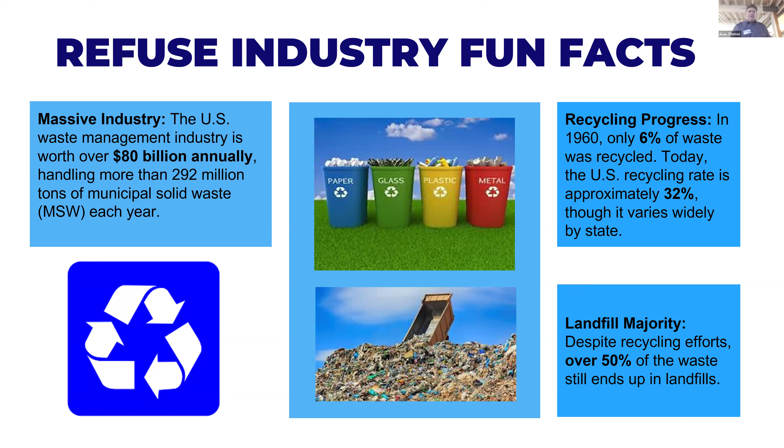And so a couple other fun facts. Electronics can be recycled, but it needs separate things, and usually there's a separate place to go drop your electronics off. So usually only 20% of electronics is really properly recycled.

And a big contributor, surprisingly, is food waste. Food waste is a huge contributor to landfills. And actually some municipalities, like the city I live in, the north side of town, just a few weeks ago, they started adding composting, a fourth type of trash. So I got trash can, recycling, yard waste, and now there's composting as a fourth type. So that is a huge contributor. Kind of surprising, but people throw a lot of food away in America.

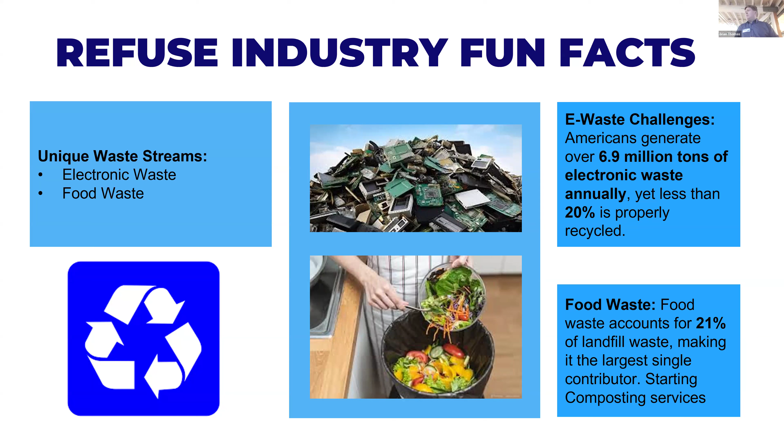Just a couple other fun facts. Some companies are learning to reclaim the methane from decomposing waste to generate electricity and can power like 1 million homes with electricity annually. And then single stream recycling, having them sort things or just allowing people to throw everything together and the company sorts it out. There's been different studies on how compliant people are with that.

So I went to go work for a company that's about an hour south of the Twin Cities that makes garbage trucks and cement mixers and other industrial trucks, not trucks that transport stuff, but trucks that do stuff, like a garbage truck. And they wanted me to connect them all to the cloud. And so they have 3 different product lines, and this is going to be important later on in the presentation.

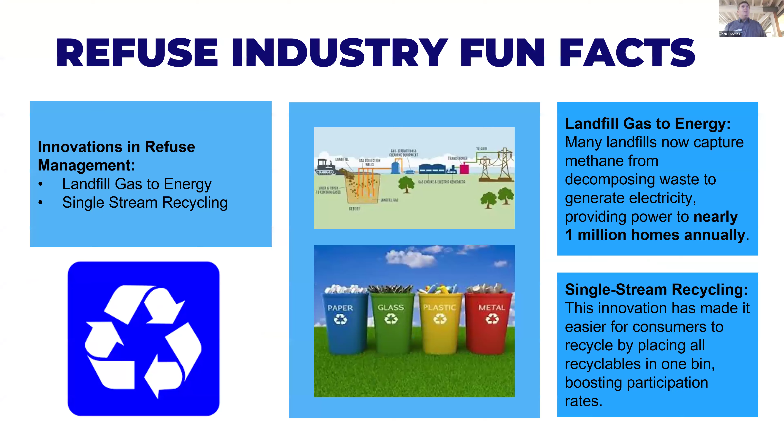There's a front loader that has 2 arms that will reach down and grab a commercial dumpster, like from a restaurant, and throw it over the front of the truck into the back of the truck. There's a side loader that has 1 arm that reaches off your curb, grabs a residential can and dumps it in the side of the truck. And there's a rear loader that has no electromechanical arm, but usually there's a second operator back there. And so we connected them all to the cloud.

So we designed a telematics unit and put that in the truck, and that connects to the CAN bus of the truck. CAN is an acronym. It stands for Controller Area Network. And so all the control systems of the truck, all the electronics of the truck, all communicate with each other with this CAN bus, this Controller Area Network. And so we connected this telematics unit to the CAN bus so we could monitor everything the truck was doing.

And then there's a cell modem in the telematics unit, which sends the information up to the cloud. So we monitor what's going on with the truck and make a cell phone call up to the cloud and transmit this data periodically. And from that, we were able to create websites that would allow big companies like Waste Management and Republic and small companies, municipalities, to manage a whole fleet of trucks, find out what's going on with them, and monitor them in real time to deliver performance, efficiency, and safety. So this is information going from the truck to the cloud to a website.

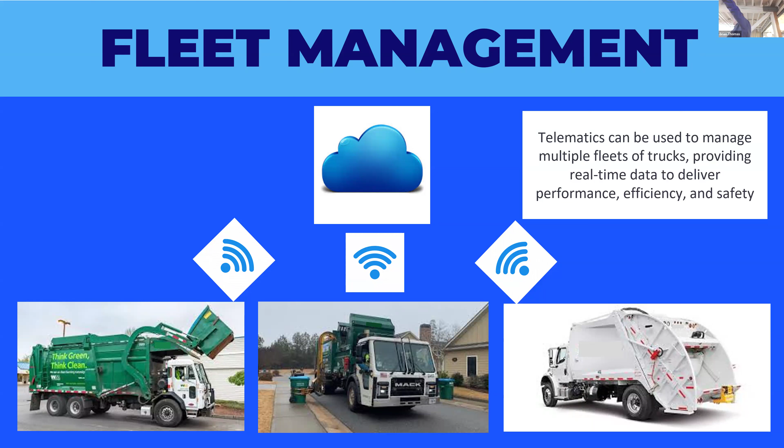And then we launched it with production-grade cybersecurity. A lot of times when you have the cloud, you've got different environments: a dev, test, stage, and production environment. So we had a security certificate in the cloud for our production environment. And then to make it secure in the truck, we created a public-private key pair. We kept the private key in our factory.

We signed the software when we created a new version of firmware for the truck. We signed it to make sure that it came from us. And then we'd send it over the air, and the truck would verify it with the public key and say, yes, this is software that's legit, that it came from the company and not some hacker. And then it would change the software in the truck.

And so once we had this, this is a platform that enabled the use of AI. So we could quickly load new software in the cloud, load new software in the truck, and regularly we could update software multiple times a day if we wanted to try new things with AI on the truck.

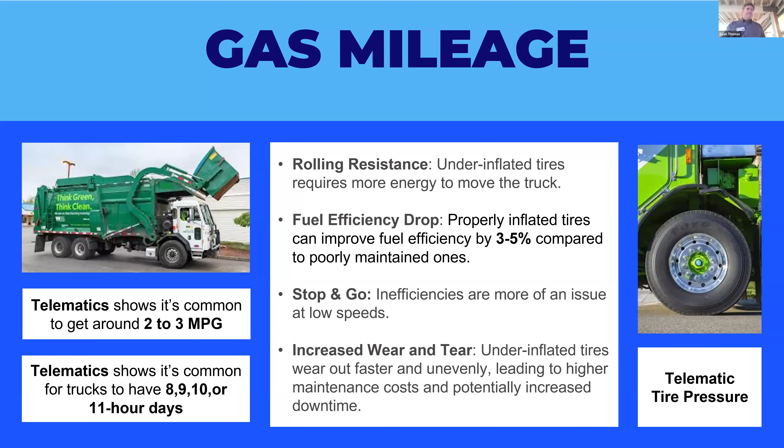So with the telematics, you can also do route optimization. You can help them find the most optimal route. A driver might be sick one day and they might have to reroute trucks. And so with this, you can dynamically reroute the trucks.

Another thing is backing up the trucks. There's not a lot of windows in these trucks and there's blind spots. And trucks can damage things when they're backing up. So we try to minimize the amount of times they back up. And we record every time they back up and we drop a pin on the map and we provide a report to management, and the management can look and see, why is this driver backing up 10 times more than this guy? Does he need coaching on how to drive a truck like this?

Or maybe it's legit because he's got a route that has a lot of cul-de-sacs on it. And in the cul-de-sacs, if cars are parked out there and the garbage cans are out there, trying to get a truck in there and around, that might be a legit reason why they're backing up, but they try to minimize backing. Okay.

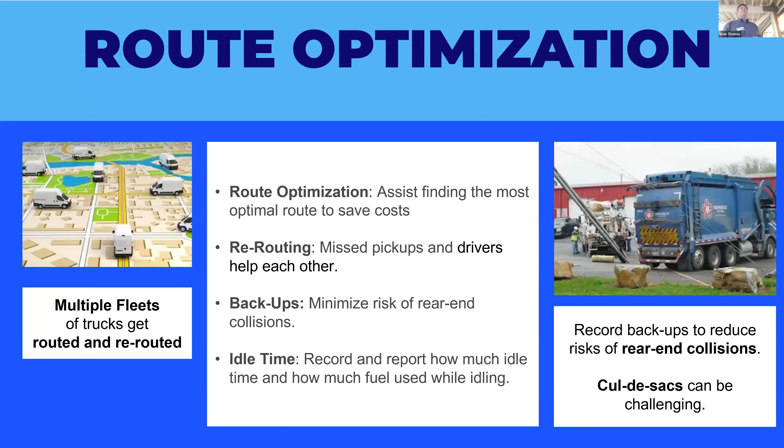So I was originally hired as director of advanced connectivity, which is just IoT, but we got the system up and running in just a few months and they were like, wow, we've been trying to get this working for years. And so they asked me if I could assume additional responsibility and be the director of advanced technology, which is AI and IoT, and be responsible for these advanced technology areas: automation, electrification, active safety, sustainability, which is friendly to the environment, and advanced connectivity, which is what I was originally doing. So I assumed this additional responsibility.

And one of the things we did is then we put cameras around the truck, so we could monitor what the truck was seeing when it was driving. And we took pictures all day long. And then we sent these pictures over to our friends in India, who helped us label these pictures and put bounding boxes on things to identify where the garbage cans were and other things that might be on the curb, like a mailbox or a dog or something like that.

And then we created an AI model and we trained it with all these pictures and we fine-tuned the model so that it could accurately identify what the garbage can looks like. Originally we took over 10,000 pictures of trash cans and we used 80% of those to train the model and then 20% of them to test our training to see how accurate it was. As time went on, we had more and more trucks with more and more cameras doing more and more routes, and we had more data. And after a while, we were using about 50% of the data to train it and 50% to test it.

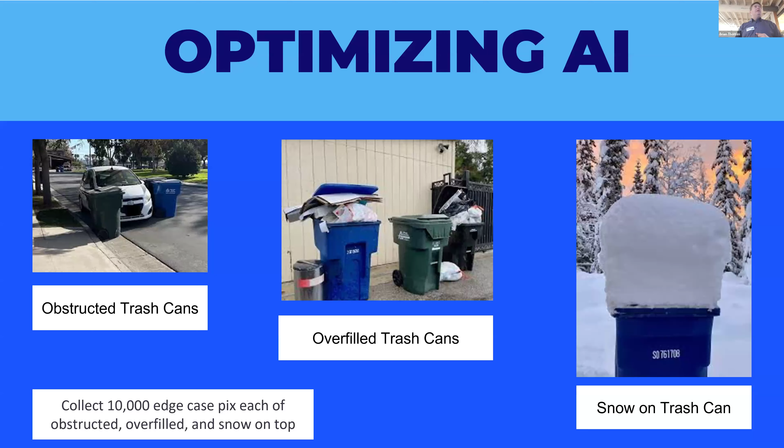Okay, and then, so now we've trained the trash truck to be able to understand what a garbage can looks like. Now here's a problem with the side loader. When somebody's been doing it for a few months, they get pretty proficient at it, but for the first couple months, they're not very good at it. They got a joystick that they can control that arm with. And sometimes they are not very good at it and they try to extend the arm and they tip the can over.

Oh crap, then you got a big mess of trash. You got to get out of the truck, clean up the trash. It's not fun. It's a big productivity kill. You got that little shovel on the side to help scoop things up, but it's not fun when you tip it over.

Or another thing that might happen is maybe they drive up to it and they extend the arm and, oh, I'm not aligned, pull it back, drive the truck up a little more, extend the arm, I'm almost there, pull it back. Okay, third time's a charm, I got it this time, let's dump it in, but it's not as productive to do it that way. But with AI, you can detect where it is and whether you're perfectly lined up with it and stop perfectly the first time.

Okay, and then we use LiDAR, which is like radar, but with laser beams. And that allows us to detect how far away the trash can is, so that we could extend the arm perfectly. We can stop perfectly with it aligned. We can extend it perfectly, grab the trash can, dump it in, set it down precisely where we found it.

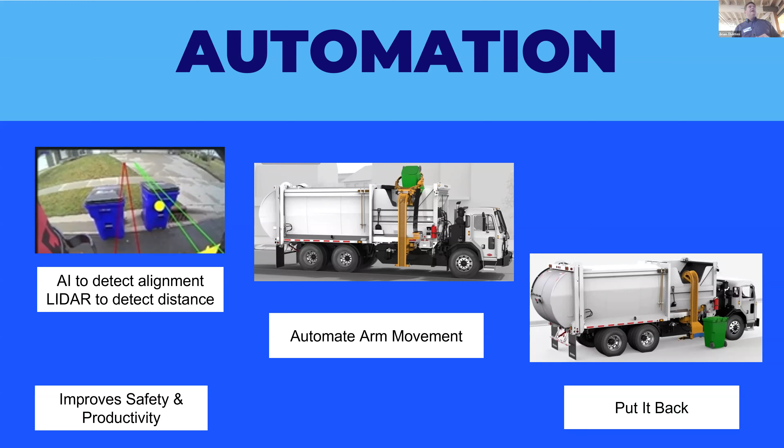Okay. Now, see here where this can is backed up against the curb. If you pushed it, if you weren't lined up, you could see how you could easily tip that over. One thing is trying to put it back where you found it. I'm going to show you a video in a little bit that shows this. The first part of the video is the old system, and the second part of the video is the new system.

Okay. So here we put it on a Waste Management truck, and see how the customer had their trash can sitting on the curb, but he left it in the street, he didn't put it back where he found it. Here he's pulling up, but he's not lined up right away. So he extends the arm, but he's got to actually drive the truck forward before it's lined up, before he can grab it. And then he puts it back, but he doesn't set it on the street or the curb. He sets it hanging off the curb where it's dangling and wobbling a little bit, so it's not the best thing. And here he's trying to line up, but he's not perfectly lined up.

Now here's the new system with it updated. He pulls up perfectly, grabs it on the first try. And it was sitting on the driveway and he doesn't leave it dangling off the curb. He puts it back where he found it, right on the curb. So it may seem subtle, but these things add up. If you do it over and over all day long and save a few seconds for every can, that can add up to a productivity improvement.

Now, this is one where the trash can was overloaded, but it was able to detect the can even with it overloaded and then put it back on the curb instead of the street or dangling off there.

So that's one use of AI. And another one, this is a combination of AI and IoT. So with recycling, this is the mixed recycling that I was talking about, where you can mix multiple different types of plastics and cans together in there. And with AI, you can in real time go in and look at the trash and see what we call contaminants. If there's something they put in the recycling that's not supposed to be there, it's contaminated, we call it a contaminant. And then that causes all sorts of problems for the company that's trying to recycle things, okay?

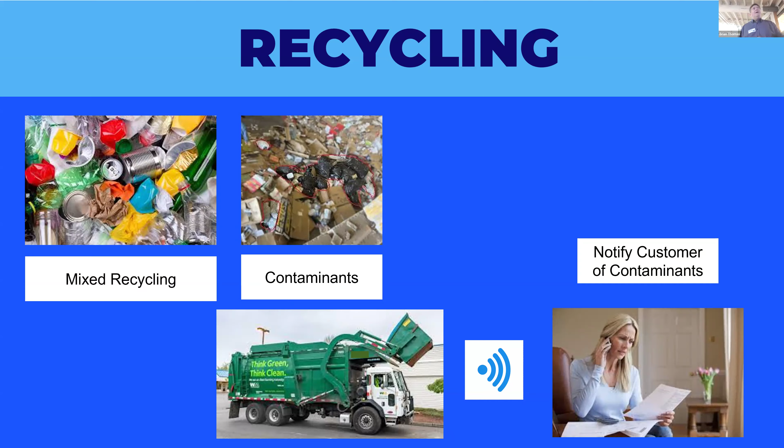another thing you can do with AI is look for a distracted driver. Things like you could be eating or drinking while you're driving, you could be smoking or texting while you're driving, or falling asleep while you're driving, and AI can detect these conditions. And you have the option to give real-time feedback to the driver, like, hey, you should go get a cup of coffee, I think you're getting sleepy.

Or you could give a report to management, or both, and then management can decide if they want to coach the driver or not, based on what they see. So that's one type of distracted driver AI. That's where the garbage truck driver is distracted.

Now, there could be another driver that's distracted. These trucks tend to start and stop a lot, and a lot of people are driving and texting on their phone at the same time. And it has been known that sometimes people, unfortunately, rear-end garbage trucks. And that's important when I talk about product lines. For the third product line, where there's a rear loader, there's a second operator back there, which we care about and don't want anything bad to happen to him.

So you can use AI to look at cars that are coming up from behind you and try to discern, does this car look like it's going to slow down and stop? Or does it look like it's going to drive around us? Or is it on a collision course for us?

And with AI and with IoT, we can put wireless electronics in the safety vest of the operator to alert them with light, sounds, and tactile feedback to notify them that they might want to get out of the way, that there's a rear approaching car that's concerning. And so we can alert the operator to get out of the way. Now, here is a situation where it's time critical. If it's safety critical, every fraction of a second counts in this instance, okay?

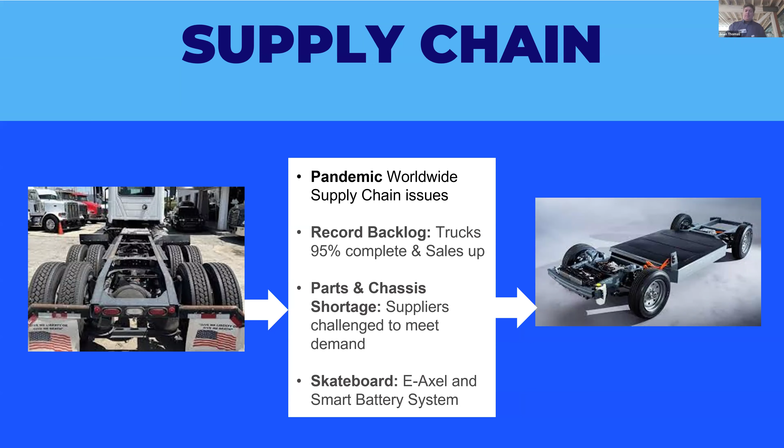So we designed and built a cool new truck, an electric truck with IoT and AI. And so part of my job was electrification. So we had to replace dirty, noisy diesel engines with quiet, clean electric motors. And so, as I talked about earlier, we designed it to have an 8-hour shift with adequate margin to get back. And then I found out a lot of the trucks were doing 8, 9, 10, 11-hour days. And oops, well, I guess we have to design it better so that it lasts longer and has more range.

But if people are familiar with entrepreneurship and designing new things, there's a concept called MVP, which stands for minimally viable product. What's the minimum functionality where somebody's willing to buy it? And then you can keep working on it, fixing it, add more features and improving it, and sell it to more people. And at the time, Republic Services said, we'll take 50 of them. And they're expensive trucks. And so they placed an order for 50 trucks in 2023 while we worked on trying to improve the range and improve the efficiency. And they liked it so much, they bought another 100 trucks in 2024. And other companies have been buying them too. So the truck, I believe, was a success.

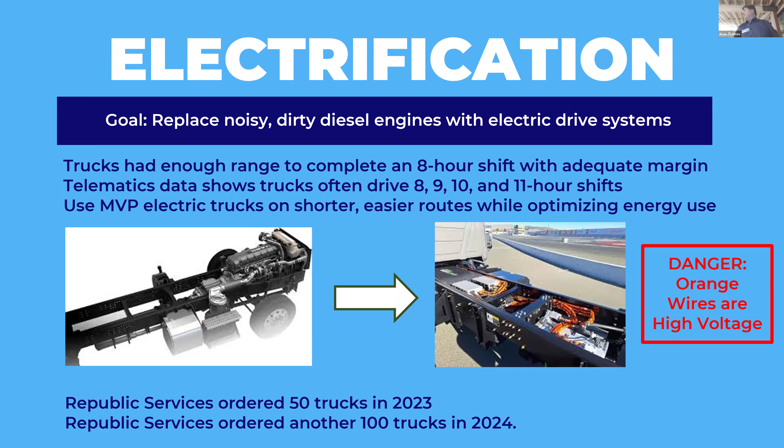Okay, so when I started developing an autonomous vehicle, I did research on it. And my typical mode of operation of developing a system is I start with customer requirements and then turn those customer requirements into system engineering requirements. And then I create some system architecture and design. And then I work on the subsystems like software, hardware, firmware, electrical, mechanical.

But when I did research on autonomous vehicles, what I was advised to do is the first thing you have to do is ODD, the operational design domain. Okay. And that is trying to define under what conditions do we believe this vehicle can operate safely and autonomously. And so we spent a couple days just brainstorming things that you and I take for granted when we drive a car. Can this vehicle drive in the daytime and nighttime?

Can it drive in sunny weather and rainy and snow and ice? Can it drive in a school zone? Does it know how to handle a construction zone? You and I just don't even think about that. Oh, there's cones in the construction zone, and you know how to slalom around it. Well, do we know how to handle that autonomously? And so we had to think about this.

And we created like 300 conditions that you and I just don't even think about when we drive, but you really have to think about if you're going to design an autonomous vehicle. So what is the domain that you can operate in safely? So that's the ODD, okay?

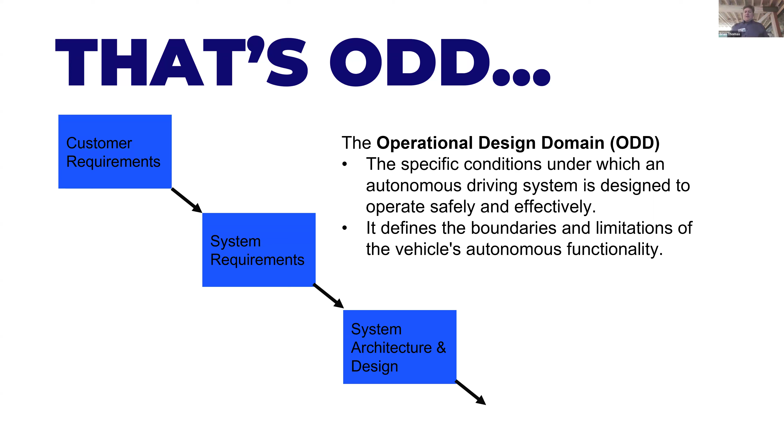And so also, since this is a safety critical system, and since I do have a background working on medical devices, another thing that I like to do is after you do the first pass at your system requirements and system architecture and design, I do a failure modes effects analysis and try to figure out what could possibly go wrong. And that's a practice that we always do in medical devices, especially class 3 medical devices, which are the most safety critical. And that helps you then take, okay, here's what could go wrong. So how do we then mitigate those things that could go wrong?

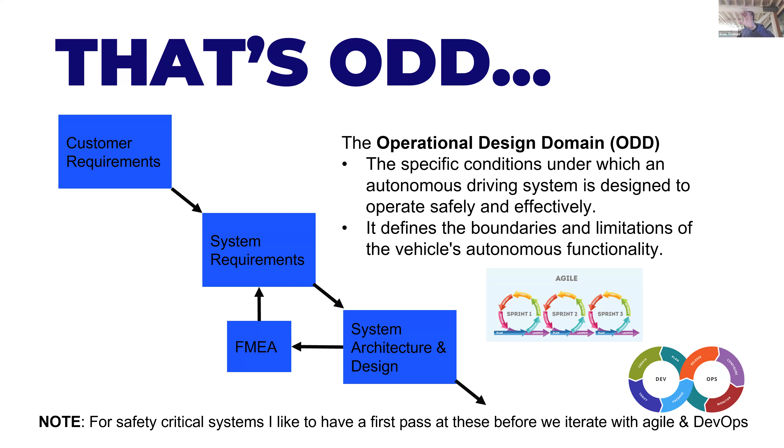And so then you go back to system requirements and you add additional requirements to mitigate the probability and/or the severity or both of things that could go wrong to create a more safe system. So you add additional requirements, additional architecture, and then after I've done that first pass through that loop, we start working on the subsystems and the software, and we start iterating quickly with Agile and DevOps and creating software after that. But we have a framework that is safe up front for autonomous driving.

So a few more things about ODD. Why do we do this? The number one reason is for safety. So by clearly defining ODD, manufacturers can ensure the vehicle only operates in conditions where it can handle it safely. And for regulators and compliance, it provides a framework for regulators to evaluate and to certify this vehicle as a safe, autonomous vehicle. And it helps the engineers that are doing system design and system testing to use ODD to guide the development and the testing and the validation of this autonomous driving vehicle.

And it also helps with user trust, so that clearly communicating ODD and the boundaries of where we think this can drive safely lets people understand where and when the vehicle can drive safely and autonomously.

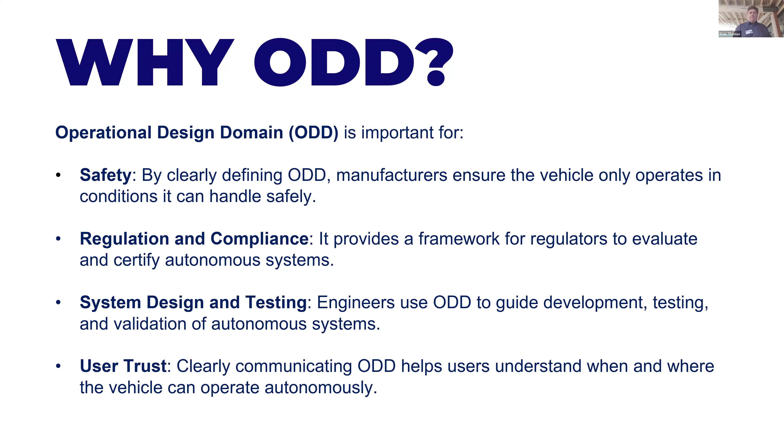So the Society of Automotive Engineers has defined 6 different levels of driving autonomy. And the first 3 that are in blue are where the human is driving. And the last 3 that are in green, the car is considered driving, although with level 3, which is what we were striving for, the vehicle is really driving, but if it tells you you need to take over, you must drive, okay? So you have to be sitting there and ready to take over driving if the car says take over, okay?

Level 4, it's not going to require you to take over, but it can't handle all conditions. And level 5 won't require you to take over, and it should handle all different driving conditions. Some of the difference between level 0, 1, and 2 is there might be driver assist things. They call it ADAS, advanced driver assist systems, like lane departure warning and blind spot monitoring. These are things that are kind of precursors to self-driving vehicles that help you drive safer, but that's just kind of the different levels of autonomous driving.

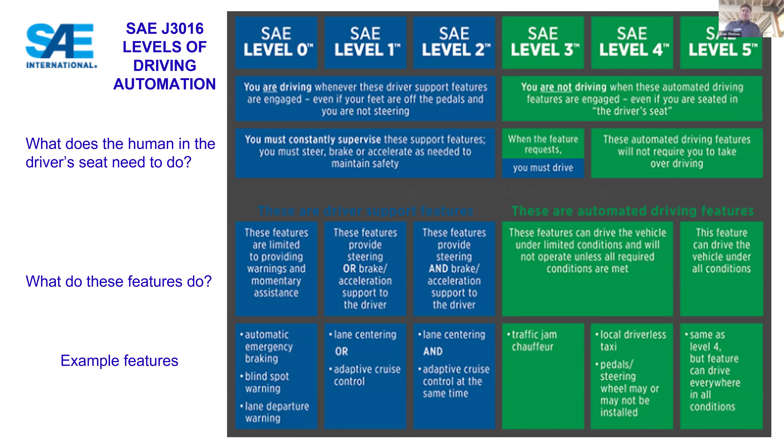So the solution. So to do this, we put a whole autonomy kit all over the truck, which has all sorts of different sensors. And some sensors are better or worse at different things. They do different things. And I'll talk more about the sensors on the next slide, but there's a variety of sensors that detect different things that are close and near and far and help you in different driving conditions or park and stuff like that.

And then all that sensor information is fed into your AI algorithm, and the output of that is used to control the steering wheel, the brake, the accelerator, and the turn signals. Okay, and there's a term called a drive-by-wire kit. And so you can put a drive-by-wire kit on your steering wheel. And so you can overpower the drive-by-wire kit by grabbing the steering wheel and driving it yourself. But if you have your hands off the wheel, the car can control the steering wheel autonomously for you, and the gas and the brake and the turn signals.

So there's a bunch of sensors that you put on the car. There's ultrasound, GPS for navigation, gyros and accelerometers for orientation and motion tracking, LiDAR, which is like radar, but with laser beams. Radar is better for long distance, cameras, and there's pros and cons or strengths and weaknesses of each of these different types of sensors. Some of them work better or worse in different types of weather conditions. And some of them are long distance or short distance things.

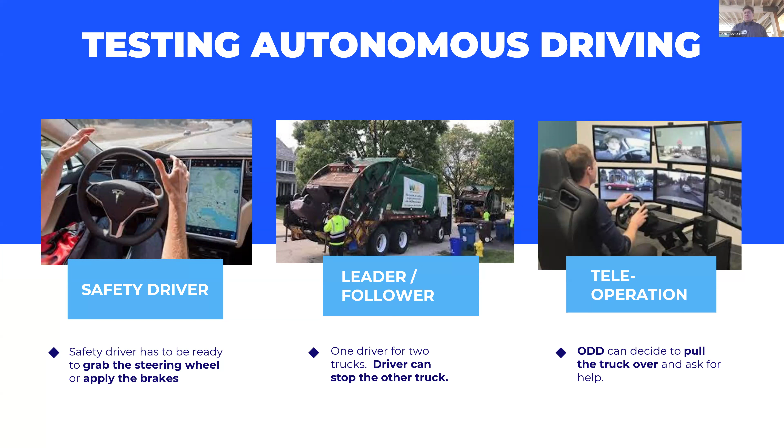in your autonomous driving. Another thing is we talked about cul-de-sacs can be challenging. So we wanted to design the truck with a tight turning radius so it could get around this. We had been buying our chassis from Mack and Peterbilt, which really designed it for long haul trucking and not necessarily for driving around in cul-de-sacs. So that was another thing we wanted to try to do.

So as I was driving the team, I kept driving and monitoring these 3 key performance indicators. So how accurate is the AI? Is it making the right decision on what to do in this situation? Since a lot of the stuff is safety critical, we wanted to look at the AI response time. Can it make the right decision, but can it do it quick enough to drive the truck or to operate the truck or to keep the operator safe?

And the third thing is, are we lowering the total cost of ownership of the truck? That's why people want to buy this, to make sure that they're saving money and improving their business. And everybody's talking about the savings it can get from AI. And we did some calculations, and we believe that these new trucks are about 14% cheaper to drive than the traditional truck. The total cost of ownership is lower.

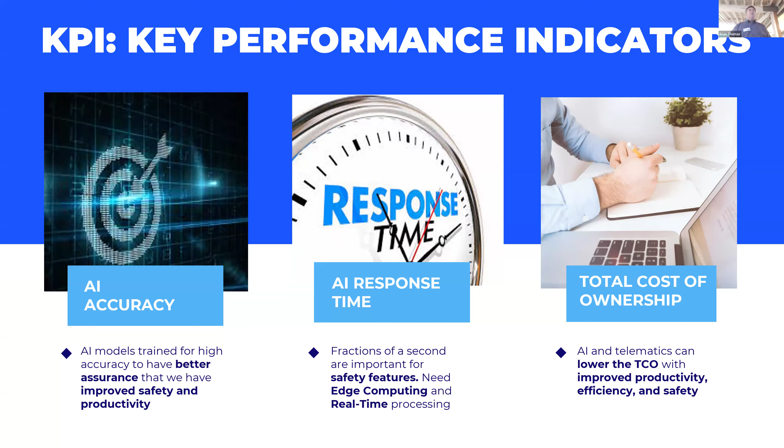So this is something that's a future opportunity. At the time, this was a few years ago, before all this stuff came up with generative AI and agentic AI. They thought we can have a customer success manager help the fleet manager if they have questions, but a future opportunity would be to use some of this generative AI so the fleet manager could directly get some advice from an agentic AI, or the customer success manager could talk to them too to help find advice of what to do in these complex situations.

So this is this Volterra truck that we developed and sold to Republic Services. And here's a little quick video.

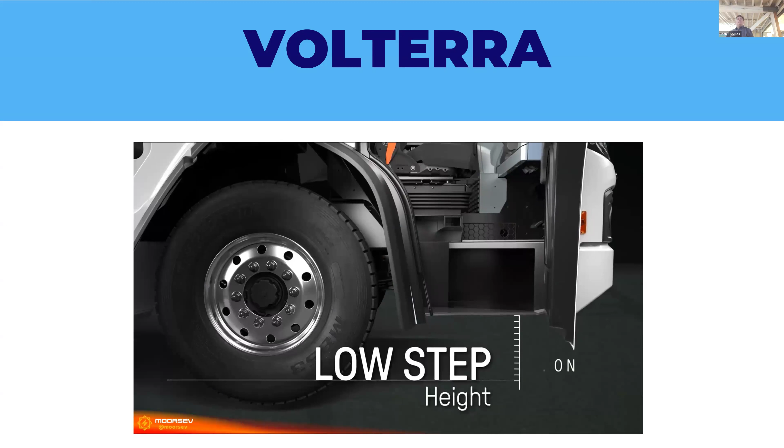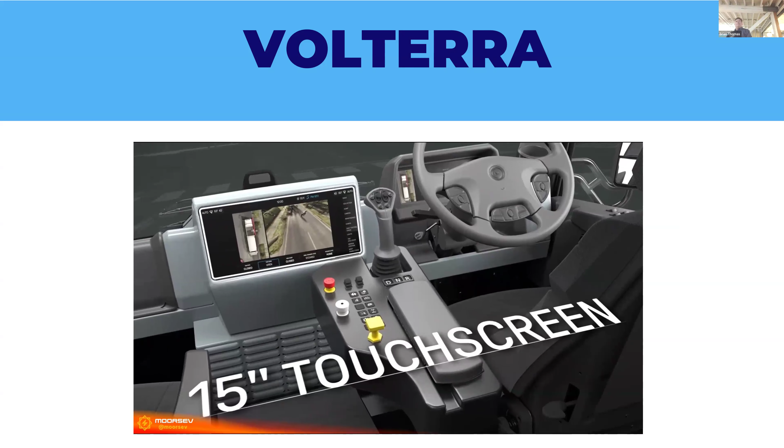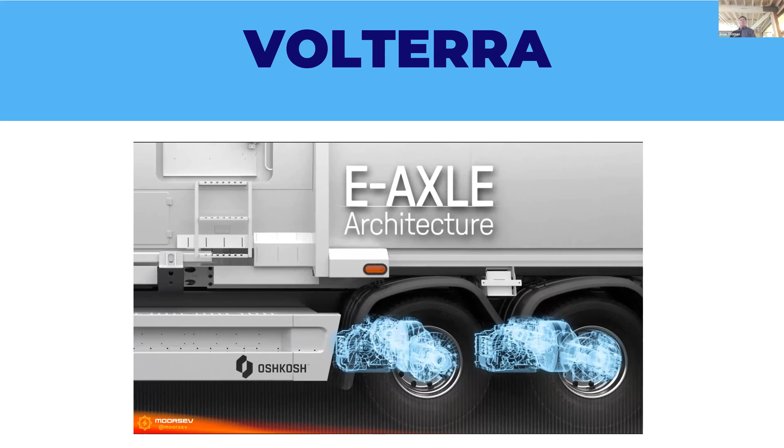One vehicle is changing the refuse collection landscape. More than a truck, we've engineered a product category all its own. A North American first, purpose-built from an industrial technology leader. Oshkosh fully integrated electric refuse collection vehicle. Integrated, advanced, sustainable. Poised to deliver one of the best driver, technician, and owner experiences imaginable. The vehicle's unique integrated design puts the driver first. From the moment you enter our pass-through cab, you'll notice the low step heights, helping to make a hard day's work a little easier. We've created 38% more space in the cab. There's more space in the cab because there's no engine in front. Advanced driver assist systems. And the window is back too. Productive ride, whether you're 4'11" or 6'2". Direct visibility helps drivers see obstacles. See the big window now because there's no engine in front. McNeilus zero radius vertical liftoff, combined with a tight vehicle turning radius, makes maneuvering cul-de-sacs a walk in the park. Our active safety systems include a 360-degree camera, cross traffic and lane departure alerts, object detection, and auto braking, so drivers are aware of their surroundings. The streamlined controls and 15-inch touchscreen minimize distractions and make operation intuitive. Tire pressure monitoring, condition-based maintenance, automated daily checks, and cloud-based telematics keep your vehicles, drivers, and business running smoothly. Yet perhaps the biggest impact we'll make is on the environment. Our electrified drivetrain is built on an e-axle architecture. Combined with our smart battery system, you'll be able to run an all-day route on a single charge with zero emissions. Integrated, advanced, sustainable, raising the bar while lowering the total cost of ownership by up to 14% because it all comes standard. The fully integrated electric refuse collection vehicle, a monumental achievement, and only from Oshkosh.

So that's kind of the function there.

So there's a lot of different applications of AI, not just the chatbots that everybody's talking about these days, but there's a lot of stuff you can do with AI and IoT to create smart connected products. So hopefully this kind of showed you other ways that you can apply AI, and hopefully it was educational, informative, fun. So that's what I got. I don't know if you guys have any questions.

This is all battery. The battery's charged and they head out. There's nothing that could interrupt the connectivity and leave them stuck, or if it does, you get the ODD message. So there is a big bank of batteries. It's not just one battery like your car has today, but there's a whole bank of batteries that are connected together to give you over 400 volts of DC, and it gives you a full day of charge, and then you come charge it overnight while the driver's sleeping, and then it's ready to go the next day.